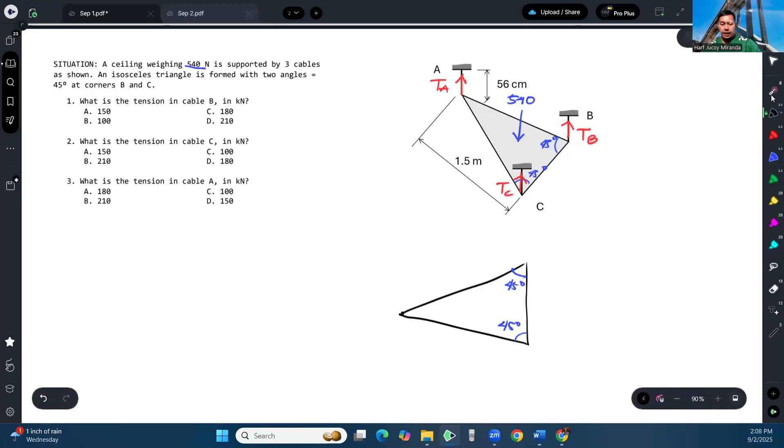And una kong gustong i-discuss ay yung isang angle dito can be calculated because ang sum ng interior angles ng triangle ay 180. So, 45 plus 45 plus this angle should be equal to 180. And kapag 45 yung dalawa, this is going to be 90 degrees. But actually, that doesn't really matter because in this particular problem, we are given this length. And ito yon, yung height niya, 1.5 meter.

So, we should note that itong weight na to should pass through the centroid of the ceiling or basically centroid ng triangle. Eh di ba ang centroid ng triangle ay matatagpuan sa one-third or two-thirds? Two-thirds kapag galing ka dito sa vertex. Okay, two-thirds of 1.5, and that is basically equal to 1 meter.

So therefore, itong kabila, which is going to give us one-third of 1.5, that is equal to 0.5 meter. So in short, itong force na to is passing through the centroid, 1 meter from point A or 0.5 meter from point B.

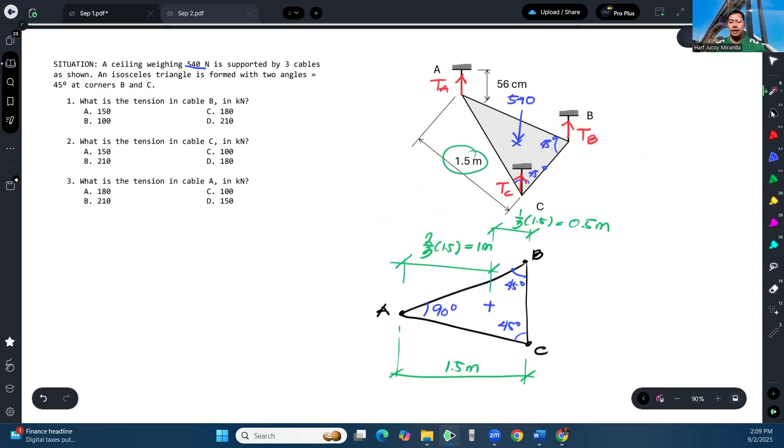And to solve for the tension, dahil parallel force system lang naman to na 3D, we can just look at this axis. Kapag dito tayo tumingin, makikita natin yung ceiling parang flat plate na lang siya. Tapos andito yung tension sa A, tapos andito yung tension sa B at saka sa C.

Magkapatong, 'di ba? Kapag dito ka nakatingin, magkapatong to. They are overlapping. And of course, yung self-weight na 540 newton. And as mentioned, yung sukat na to, dahil centroid yan, will just be 1 meter and 0.5 meter. And this is all in all 1.5.

Okay, so to solve for the tension in A, we can just take summation of moment at this point. Taking summation of moment at B or C equal to 0, assuming counterclockwise positive, we have 540 times 0.5 minus tension at A times 1.5 equal to 0. So we can solve for the tension at A.

So ito yung 540 counterclockwise. Ito naman yung TA clockwise kaya negative. And that would give us 540 times 0.5 over 1.5. So 180 newton. Okay, so the tension in A is 180 newtons.

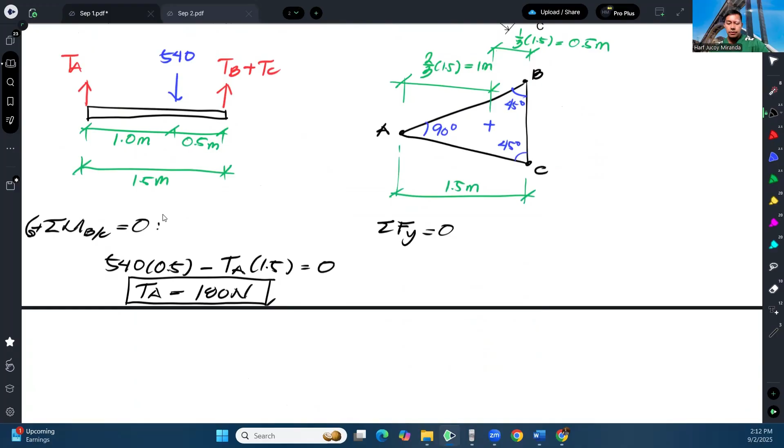Next, let's compute for cable B and C. So dito sa setup na to, we can solve for this sum. To solve for that, take summation of forces y equal to 0, assuming upward positive. So TA, which is 180, plus tension at B, plus tension at C, minus 540 is equal to 0. So yung sum ng dalawa is gonna give us 360.

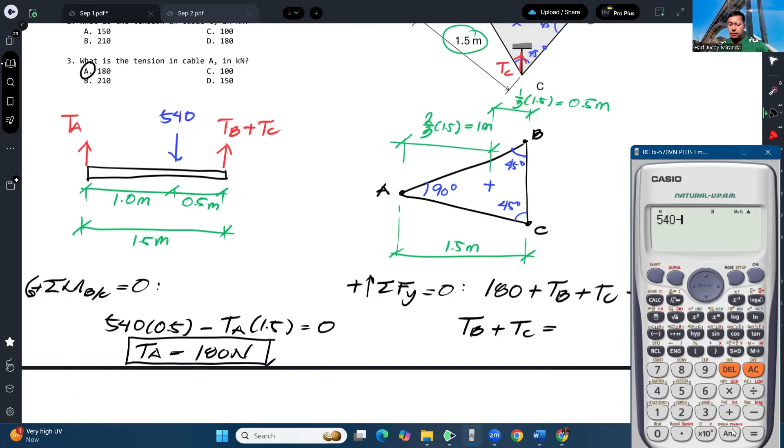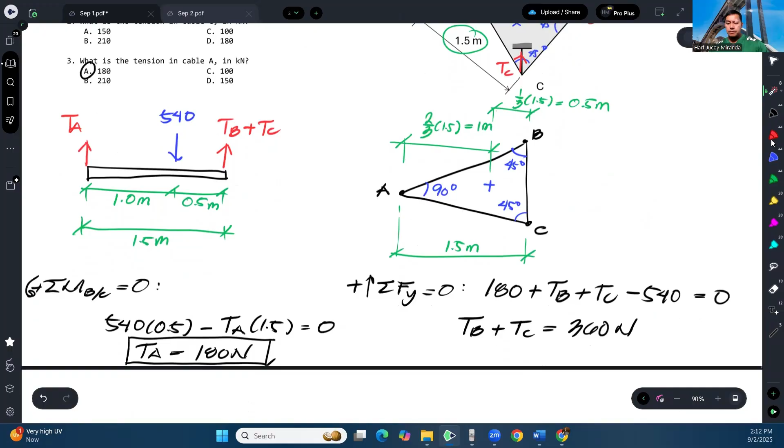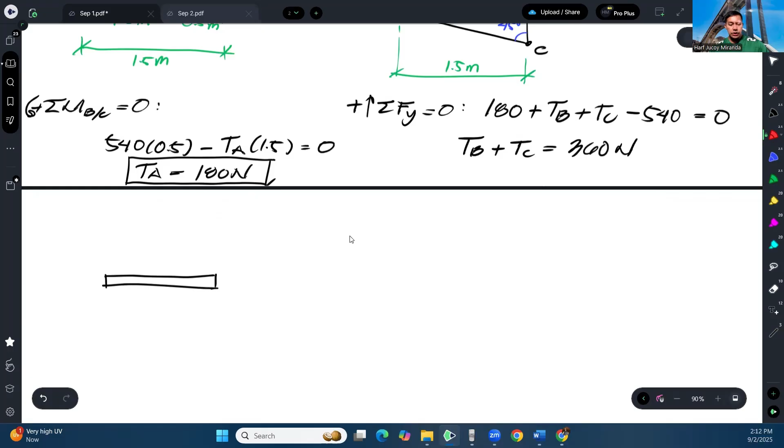Now, to solve for each, dito naman ako titingin. Pag dito tayo tumingin, parang flat plate ulit, na kung saan nandito yung tension sa C, nandito yung tension sa B, and then, don't forget, nandito sa gitna yung tension sa A. Tapos nandito yung weight na 540. So guys, madali nating marirealize na yung tension sa C tsaka sa B will be equal.

Bakit? Kasi this is an isosceles triangle. Once we draw a line dito sa gitna, we will see that this length and this length are equal. So hindi ko na isa-solve. Let's say ito yung distance na yon, tsaka ito. By the way, this is 180 already. By symmetry, marirealize natin na ito tsaka to will be equal, kasi pareha sila ng layo mula dun sa gitna. So basically, di-divide mo lang to ng 2.

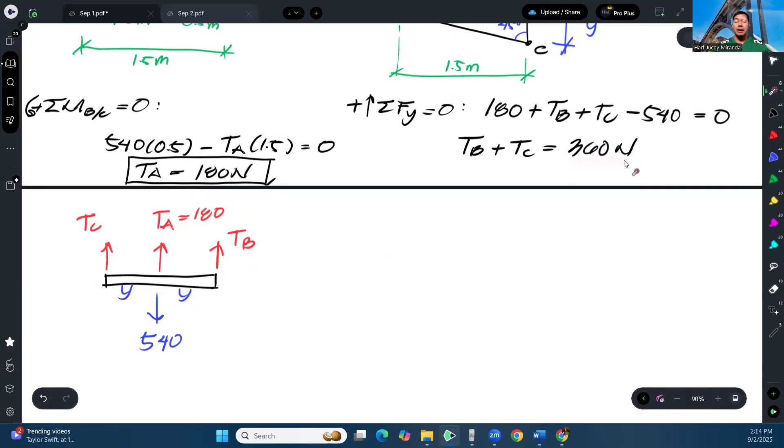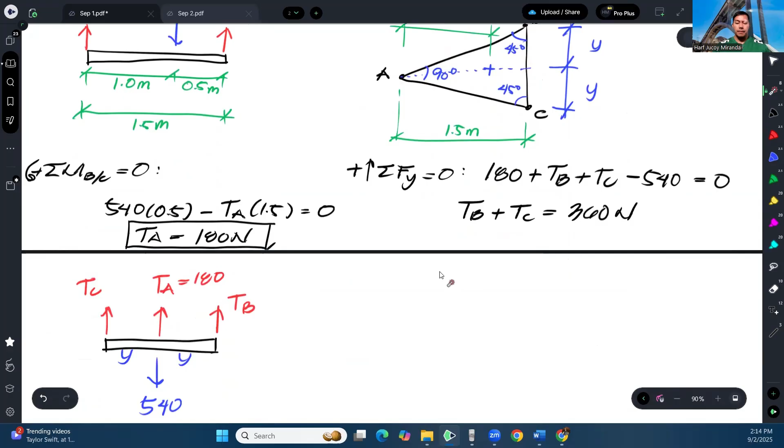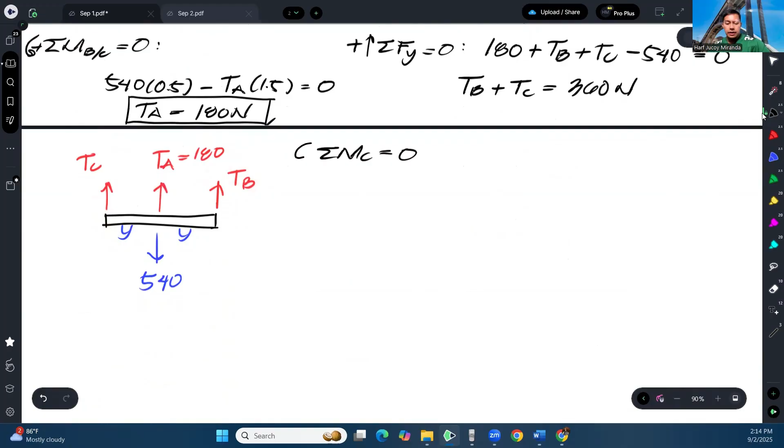Pero pakita ko na rin kung hindi mo na-realize yun. Let's say kinuha mo yung length niyan from this triangle, that is just tangent function. To solve for tension sa B, take summation of moments sa C equal to 0, assuming counterclockwise positive: 180 times Y, minus 540 times Y kasi clockwise, plus tension sa B, ang moment arm ay 2Y. So magka-cancel lang yung Y kaya hindi ko na sinolve.

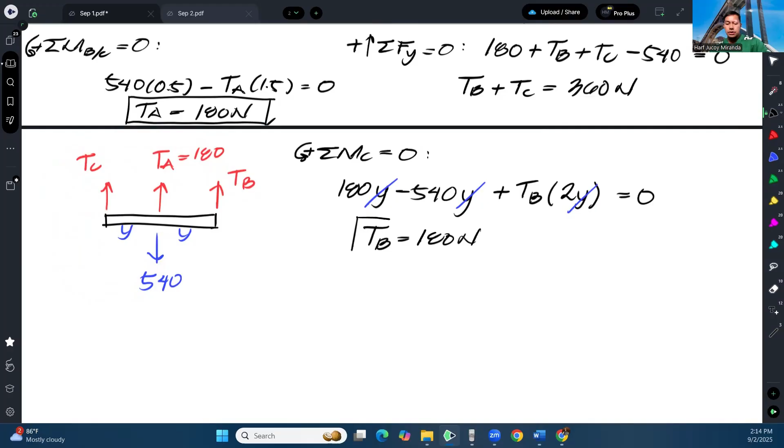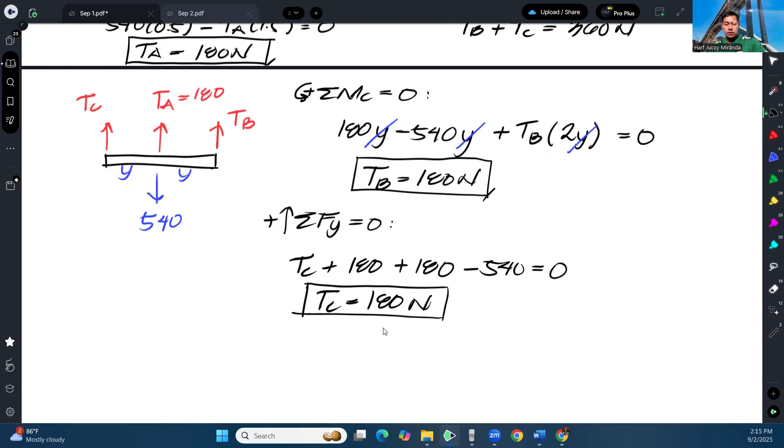And from there, tension sa B is 180 newtons. And likewise, kapag nag-summation of forces Y tayo, madaling ma-realize, yung tension sa C, 180 din. Tension sa C plus 180 yung tension sa A plus 180 yung tension sa B minus 540 equal to 0. So therefore, yung tension sa C ay 180 newtons. So that is letter B.

So actually, this is similar to a past board exam question. Ang iniba ko lang dito is yung angle. Sa past board exam, ang binigay ay 60 degrees, so equilateral triangle yon. Kapag ganun, obvious masyado na yung mga tension nitong tatlo ay equal lang. Kaya ang solution, itong 540, divide mo lang ng 3. So 180 din.

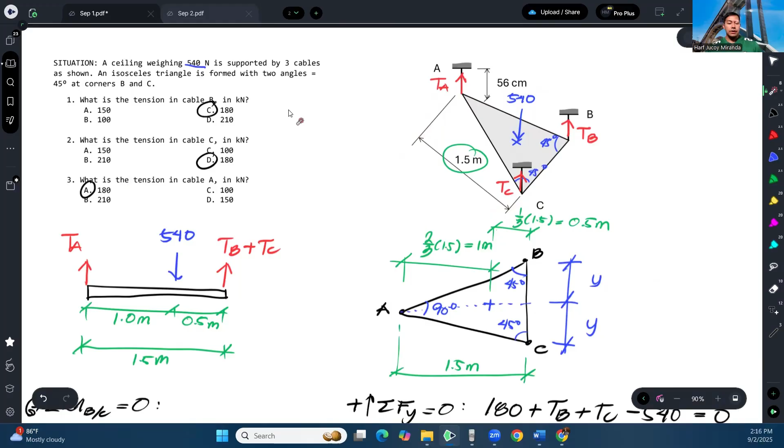So ngayon, kahit hindi equilateral, kahit isosceles lang, basta yung mga cable mo nandoon sa mga vertex ng triangle, equal pa rin yung magiging tension nilang tatlo, basta given ka ng height. Alright? And that's how we solve this problem.